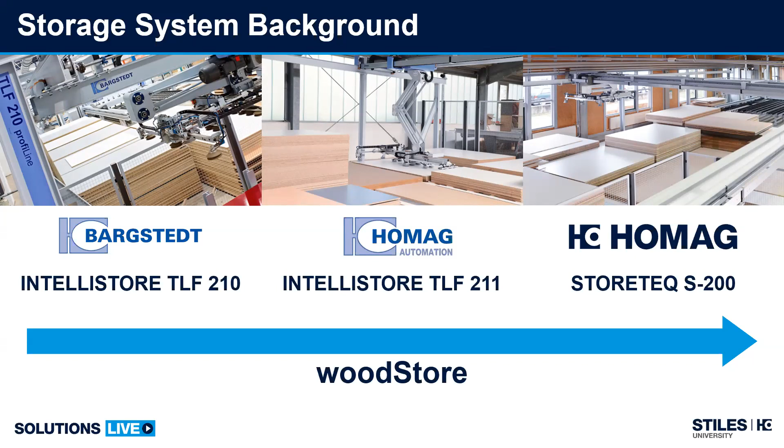So one of the things that's vitally important within the system, and anybody who's been running the system knows this: if you are incorporating a saw and using CutRite, you've probably already created your board code list. We just bring that board code list up to the IntelliStore system or to the WoodStore system.

But those board codes need to match. They have to be identically the same between the two softwares. Otherwise, we start having communication issues, we have inventory issues, we may even start developing or designing phantom panels, and it just becomes a mess over time. So there really aren't any hard rules for what your board code has to look like.

Everybody has their own special opinion of that, but you are limited in special characters. So a lot of times we're just listing what is the core material, the thickness. Does it have a top coat? Is it white melamine? Is it a colored melamine? High pressure laminate? Are they plastic materials? And then we typically add in at the end the overall size of the panels.

Now, one of the things that can help you with the system, and we're projecting down the road, is that our board codes typically record material type, the species if we're dealing with veneers, the color of the materials, high pressure laminate, we get into the plastics, solid surface materials, and obviously dimensions, and the panels are all weighed.

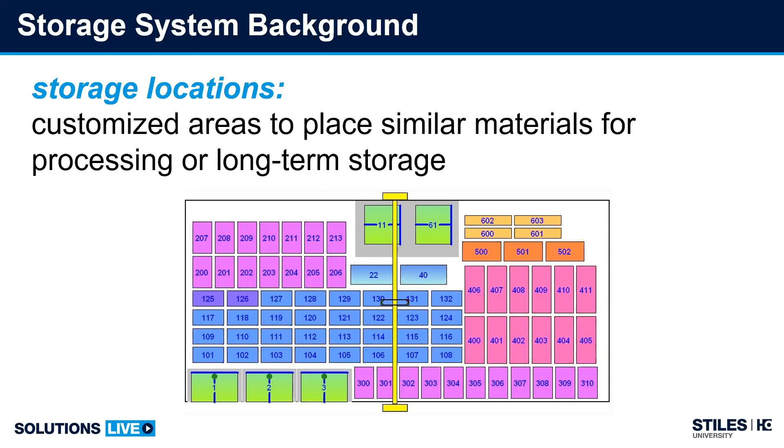So I have 2 suggestions. If you're going to design your own colors for the groups, try to stay away from the dark colors. You can't change the shade of the numbering, so the dark shades, the numbers become very hard to read. There's a blue line that shows up on the edge of the board to show you the level of capacity, how much room do you have. Those become very difficult to see. And try to stay away from the bright green colors because that gets confusing - is it a storage location, is it a machine, is it a conveyor? So other than that, you can do whatever you need to with the colors.

So let's talk about the difference between automatic storage and manual storage. Automatic storage is always referred to as being manipulated by the crane, so it's within the safety boundary, within the fence system. Manual storage is external - it could be in another building. It could be just a stack of material that is positioned someplace in the facility that we're waiting to use, or maybe it's a material that's being stored for a future job coming up.

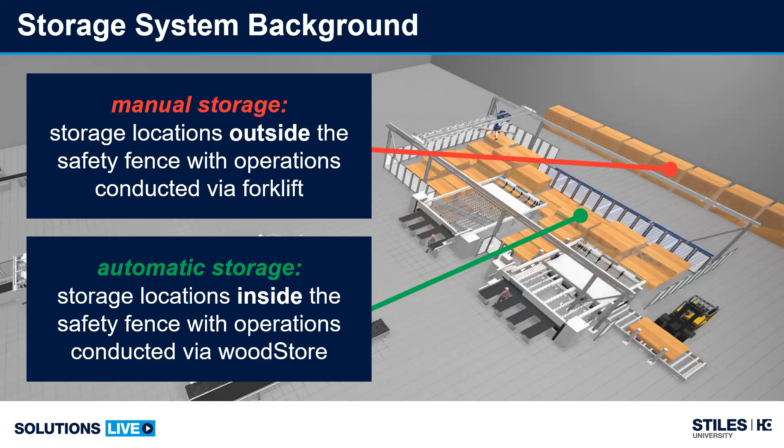So transfer options: we can transfer panels within the storage system, so we can move materials around if we need to manually optimize where we put these panels. Maybe when we first started with the system, we didn't project far enough ahead as to the variety of panels, maybe we want to help the system. But the system will also start looking at optimization on its own based upon how we set the panels.

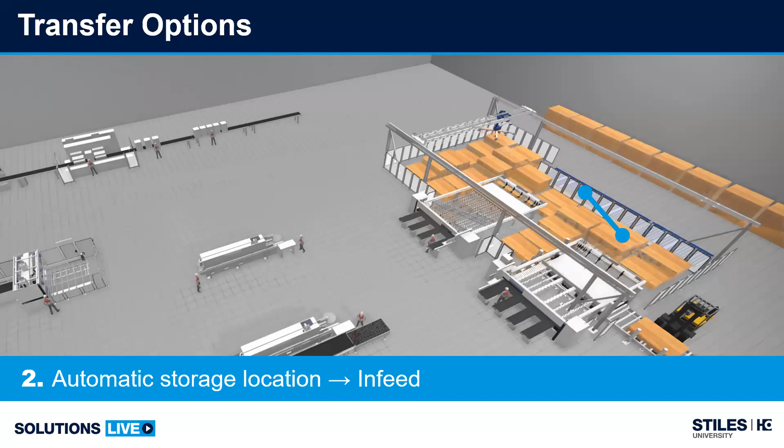We can also move materials from the in-feed to the internal storage, or we can pull materials out from the automatic storage to the in-feed. It could be that we have a problem with the material, we need to send it back to the manufacturer. Could be that we're pulling that material out because a job got canceled - now we're either going to store it or we're going to send it back. Could be that we're sending it to another machine in the facility that isn't incorporated with the automatic system. So there's a myriad of reasons we would do that.

Now we can also move material from manual storage to the in-feed, or from the in-feed out to manual storage. You'll notice that I put the note in here that there's a function within WoodStore called fill positions. This makes your job much easier, and we'll talk about fill positions toward the end of this session.

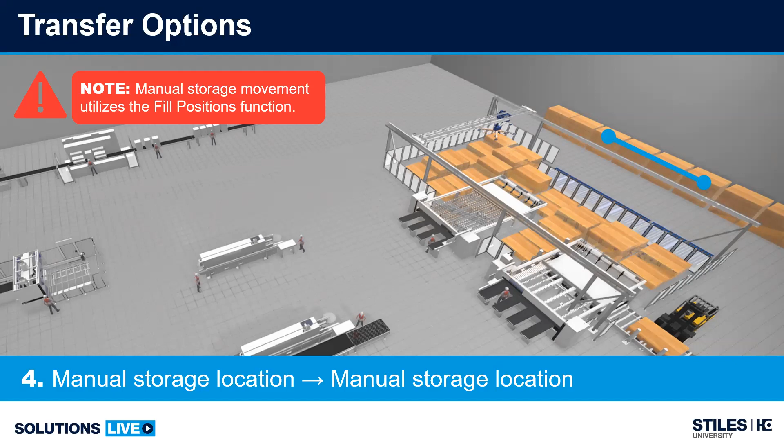Now you can move materials also within the automatic to manual, and then we can move the panel materials from manual to manual. So maybe we have 2 different manual storage locations, again, maybe we have a secondary building. So all these materials are held by inventory, so at any moment, you can determine whether you have enough material for a job coming up, or we need to expedite an order because we're going to come up short.

So some names that we throw around. Anytime I'm talking the crane, I'm talking vertical lift and rotation. So our crane will rotate 0 to 90 and 90 back to 0, it will not do a 360-degree move. We can only store materials on 0 and 90. And then the bridge is what moves the crane in the Y direction across the storage system, or in the length in the X direction of the storage system.

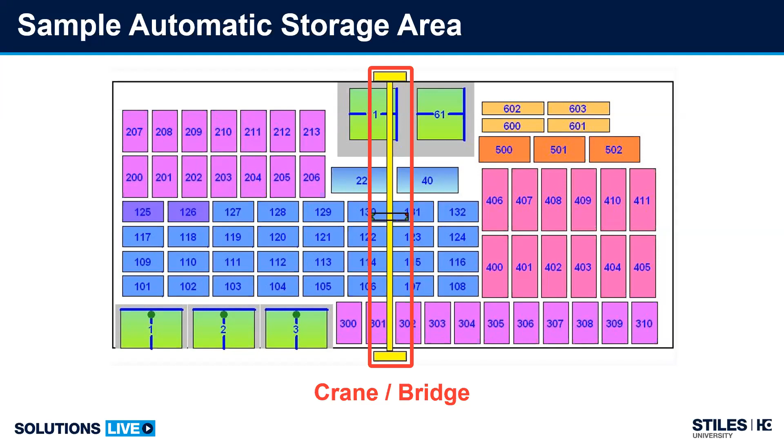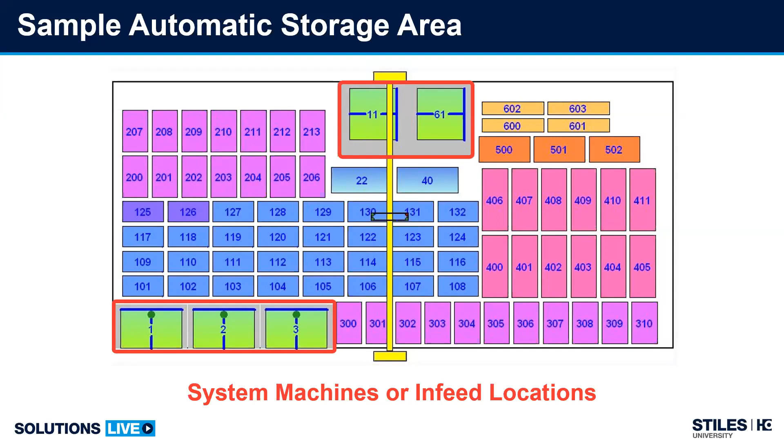We talked about machines and in-feed locations. They're all designated by specific numbers, but they're all designated by that bright green color. We talked about prior removal or pre-stacking materials - so you can designate any location in your storage system as a prior removal or pre-stacking location.

That way, when you're at home overnight, lights out, your system can pre-stack the material so that at 7 o'clock in the morning, your sawyer comes in already with a stack of random material ready to run.

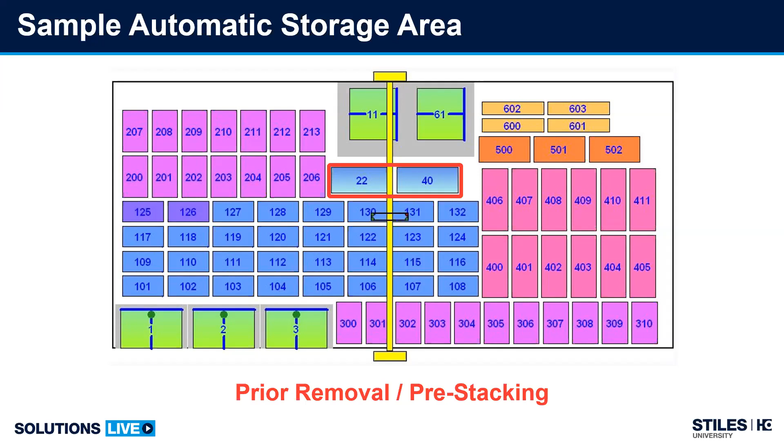You can always run any production list, but keep in mind that lift to drop anywhere in the system is usually 30 to 45 seconds. Depending on how buried the material is, you could wait several minutes for the crane to gain access. So a lot of customers do prior removals, and sometimes they designate 2 locations specifically for prior removal.

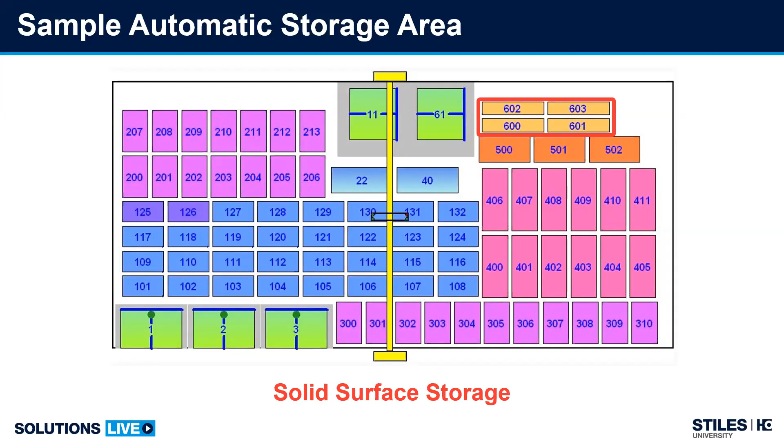I talked about storage locations. I have 4x8, 5x8, 5x12, 5x10. I've got solid surface materials, and then 2 locations that are still 4x8, but I specifically told them they're in the group veneer, so that's where all my real wood veneers go. I can be very specific about where I store that material.

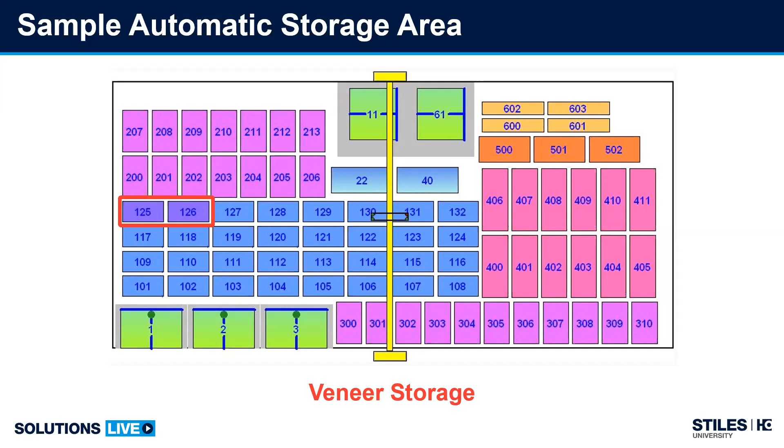So again, we talked automatic storage. That's within the system, within the safety boundaries. If you think automatic storage, think the crane.

So how do we remove material? The easiest is click and drag. You can click and drag a stack within the automatic system, go from one location to another, drag that material out of the system, or drag it back in.

It's going to pop up a display that says this is where you're coming from. In this illustration, I'm going from 124 to my in-feed number 2, and it says I have 25 sheets of material in that stack. I have the choice of how many I want to move, anywhere from 1 up to the full stack of material.

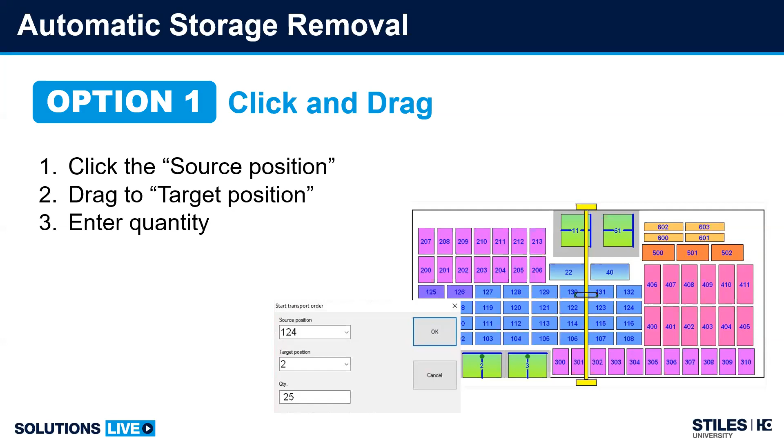But I can't pick and choose individual sheets that way, so that's where removal from storage list comes in. Within the removal storage, I tell it I need these materials. Might be we got a bad set, an off-color. If I set up the system with a distributor, I can make a list and say pull all the blue panels that came from this supplier. Right below that icon you'll see remove to in-feed, that's the start button. We click on the list, create the list, and then tell it remove to the in-feed.

When doing the removal list, sometimes the display pops up with an icon that says convert. What it's doing is uncovering—converting panels from one location to another to gain access, removing that overburden. The system will do that, and you'll see it pop up several times, especially if your system is configured more for random storage.

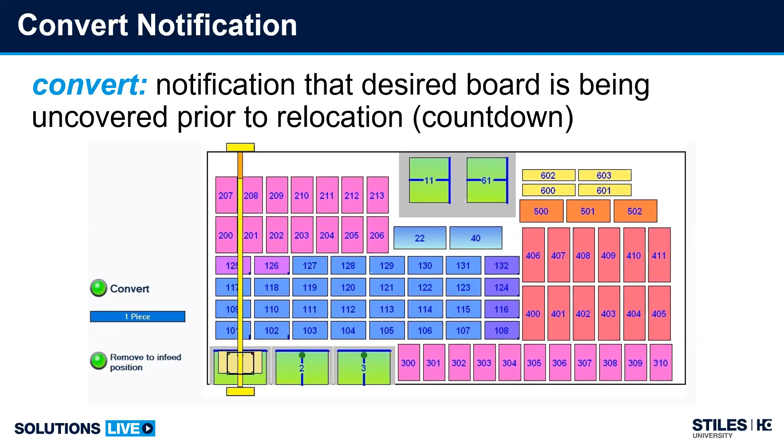Again, we talked about manual storage. You can create as many manual storage locations as you need within the software.

The last thing we'll talk about is this fill positions function. So I'm moving material from a manual storage to an in-feed. I could delete the panels from manual storage and re-enter all those panels on the in-feed, but that's time consuming and tedious, plus I can make mistakes. So why not electronically move that material from manual to in-feed?

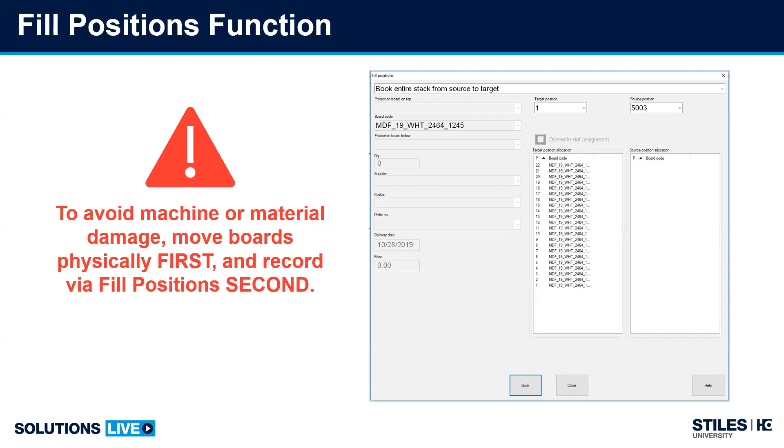Okay, so I'm going to start my IntelliStore system, my WoodStore software. Here's my configuration—you'll notice my colors have shifted a little bit. 126 and 125 are my veneered panels. 101, 102, and 103 are specifically 4x8 material, but in 3 colors: red, green, and blue. They're 19 millimeters thick. If I open up 101...

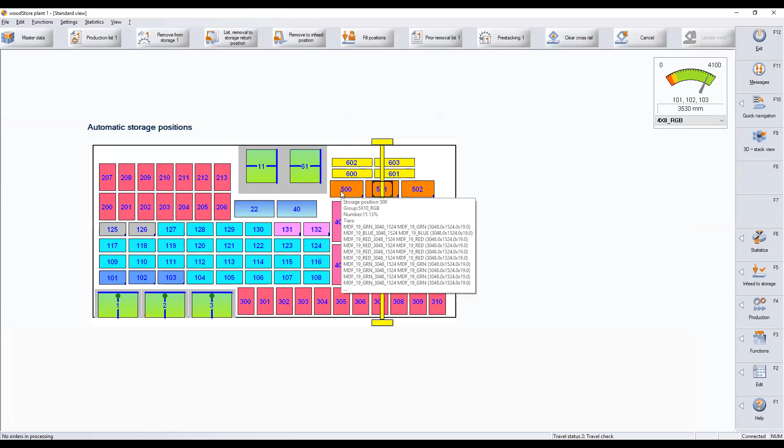Now we look at the stack, here's my board code, material code, material description—but these weren't established by any supplier, so I can't really pick and choose within that system. But if I look at 500, it has my 5x10 material, and you'll notice they're by random suppliers and this whole stack has been jumbled.

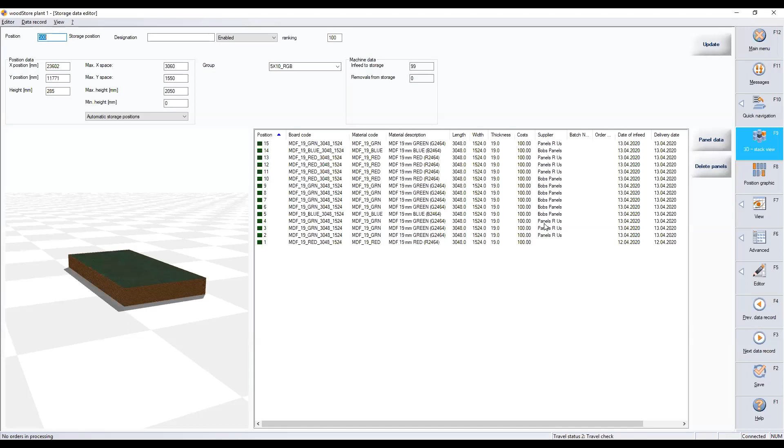So if I want to remove those materials, I can tell it I need all the panels that came from Bob's Panels. I make the list, tell it to start outfeeding those panels, and the crane does all the work for me.

So a little bit of demonstration. This is my stack of white melamine material. If I left click and drag, notice all the other locations turn gray.

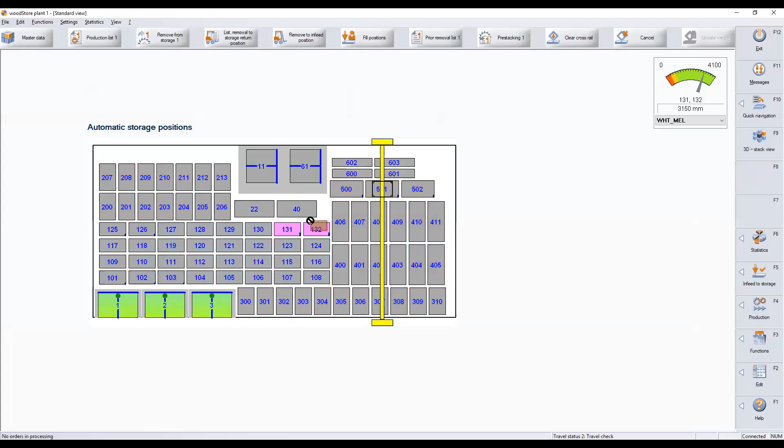So there's only 2 locations that my white material can go to, controlled by the groups. I'm going to move to location 3. It says I'm going from 131 to number 3, and there's 25 panels. Well, I only need 12. So we click OK, and now the crane is going to move those.

Obviously, my demonstration software is running slightly faster than the real system. Again, we could do this in real time, but we'd be here forever.

I can move that material back in, or I could just come over to the function buttons, click on F5, and infeed to storage. Once you infeed to storage, you're turning it over to the computer. The computer then looks at the groups and figures out where these panels need to be stored. So we need to remove some of the color materials.

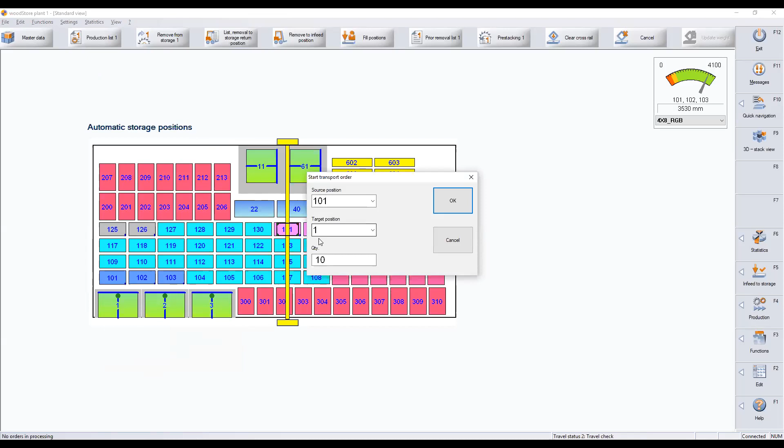So we go to 101, I drag it to location number 1. Again, going from 101 to 1, I want 10 panels. Yep, move all of them.

So naturally, I get some errors. Let's look and see what's going on with it. That was an error with my panel size and the size of the infeed. They're very close, but it did move all those materials. So it was giving me a warning.

So maybe I want to go back to my board code list and verify that my panel is the actual right size in the software. Sometimes you'll get messages, they're just telling you what's going on with the system. It didn't fault the operation, it was just giving me a notification. So we're going to drag those back in.

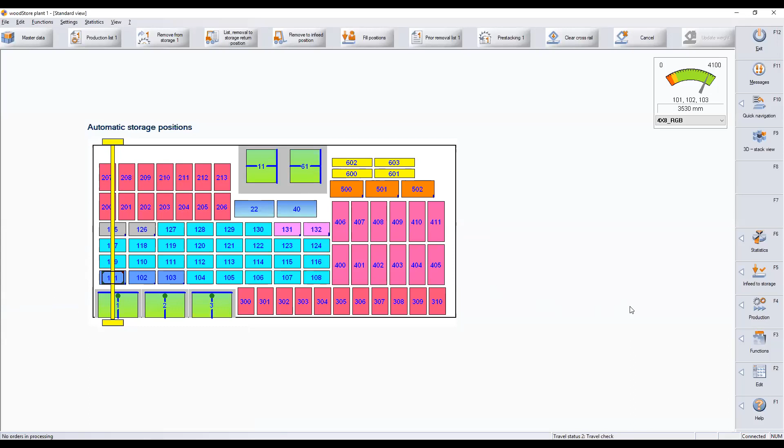Again, click and drag, super easy. If we come down to F3, click on Functions, go to List for Removal. Within this list, I double click and pull up the board code that I need. I need those blue panels.

Now you want to be very careful of this All Panel Codes option. If I come out of here, remove that material, and go to All Panel Codes, it tells me there are 155 panels in the system, and I'm removing all of them. I'm gutting my system because I need to move locations, I have to reconfigure my storage.

Think very carefully before we do this. Again, you want to be careful of all panel codes.

So we'll go back to the blue. We're going to go to location number 2. The supplier, I didn't put a supplier name in, so I can't pull up by batch number, I can't pull up by order, but I can tell it how many panels I need to pull.

So I could go in and tell it I want all of those panels. Click OK. Now I can drop over to the function bar and click F4, or I can exit back out to my main storage and click Remove to Infeed. If you look at this, 10 panels.

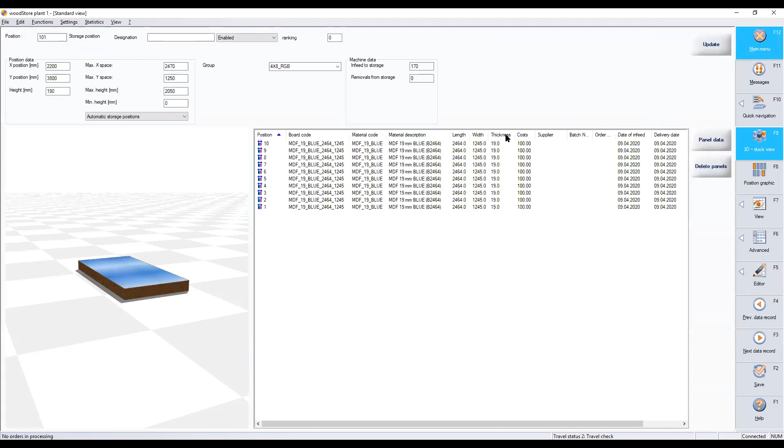That's interesting. Let me try the green panels. Phil, I think you might be using the wrong board code there, try using the second blue option. Yeah, try that one, I think that was what was. Oh, you're right, I was.

Thanks, Ian. Sure, yeah. So I was actually pulling from my 5x10 material, and there are no panels in there. So we'll go back.

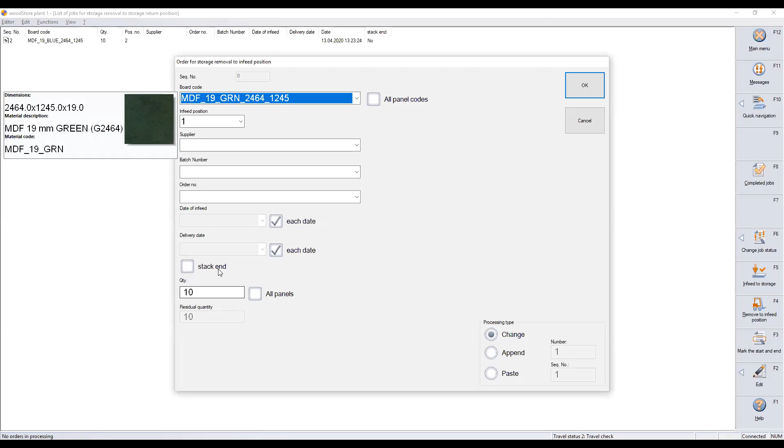Location number 2, I want all 10 panels. I can still double click, pull up the green panels, grab the right size this time. Go to location number 3. So within one list, I'm telling the system to move multiple panels out of the system.

So now I go F4 and remove to Infeed. Again, I'm getting that message telling me that I have a size disparity. So I can stop those messages from popping up, I have a freeze command. Again, it was just a notification saying that there was a disparity within that.

So here's all my panels, I've completely emptied those from the system. Again, we go into functions, list for prior removal, and then remove to infeed is the start button that moves those panels. Now I need to move those panels to a manual storage location.

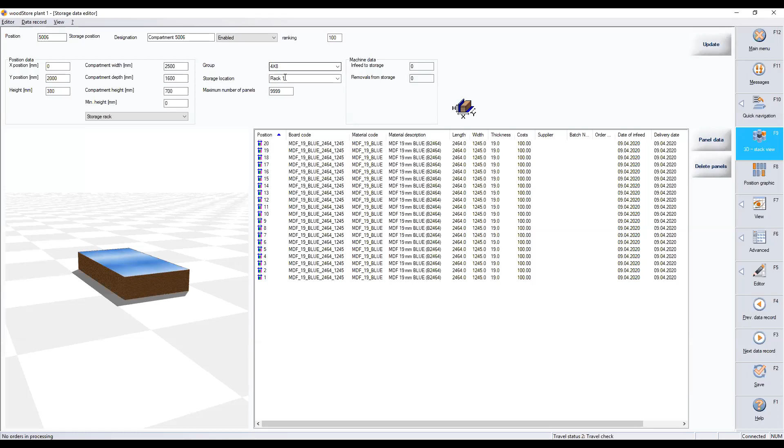Okay, so I right click, go to storage locations, and I want to look at rack 1. So what do I have available here? If I double click on 5006, I can see what my group is, and these are all 4x8 panels. If I click on 5004, these are all my white melamine.

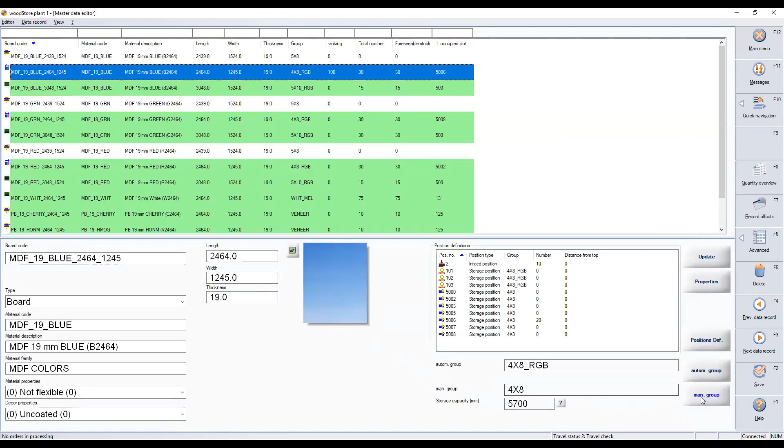And 5010, these are my 5x10 materials. So the problem I have is I have no place for these blue panels to go other than into a 4x8 location under manual storage. So I'm going to take them from one group in the automatic storage and put them in a generic 4x8. I need to move those to location 5003.

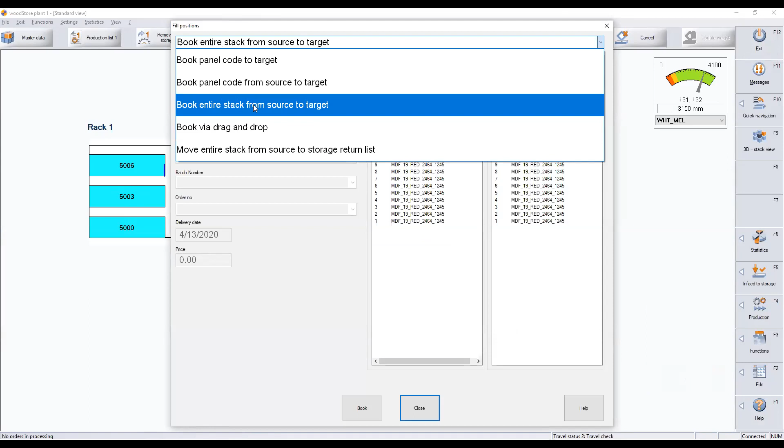So I click Edit, Fill Positions. Now I have multiple options in here. I can move a specific panel code, I can go from a source to a target, I can move an entire stack, I can even click and drag these.

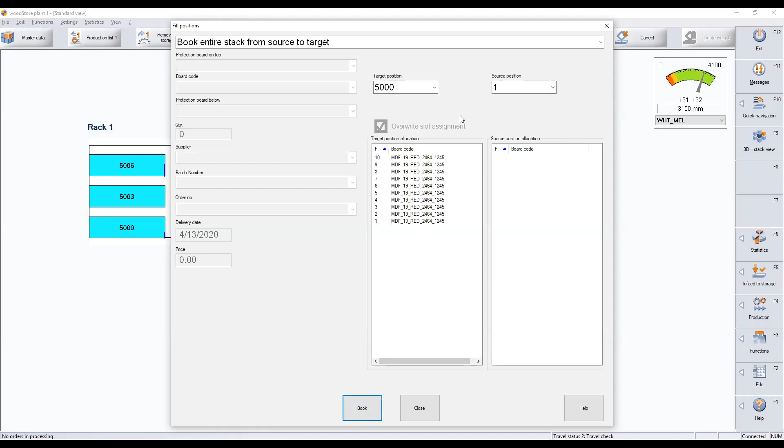So we're going to move an entire stack from a source to a target. We're going to go from location number 1, and we're going to put it in 5000. So I come down and click Book. It's moved that material electronically from the infeed location to my manual storage. So 5000 now has the 10 panels of the red material. I right click, back to automatic storage. Number 1 is empty. Much faster than deleting the material and then going back to manual storage and re-entering that material.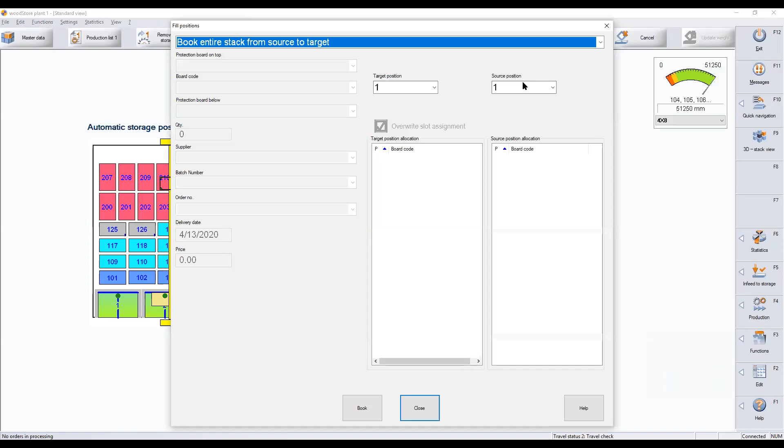So we'll do that again, only this time we're going to go into Fill Positions and click and drag. My source is number 2, and we're going to go to 5002. What I do is I highlight all the material, left click and drag. When I hit close, location 2 is empty, and I've just moved all that material to 5002.

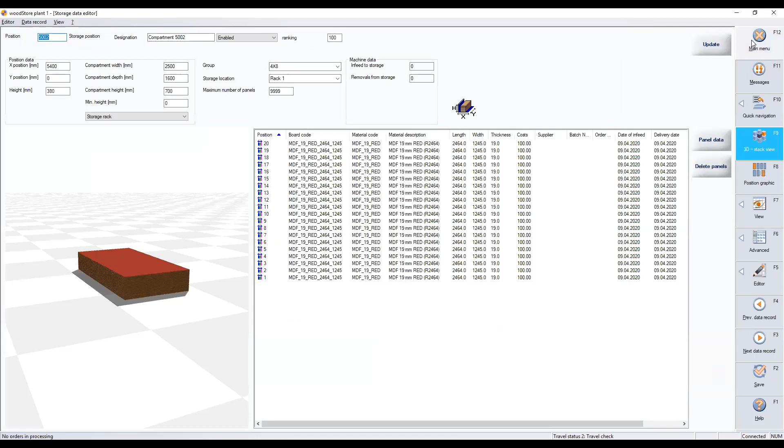So very quickly, I can use the list. I can designate which panels I need. I can do multiple panels into one location. So if I go into list for removal...

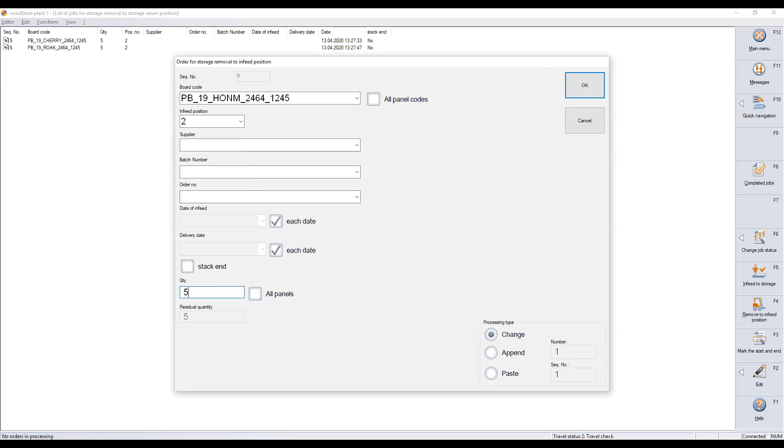So let's look at the veneers. I need the cherry veneer material going to location 2. I've got 10 panels in there, I only need 5 of them. We're also going to pull the red oak veneer, that's also going to go to location 2, and we need 5 of those. And then we'll pull up the Honduran mahogany and do the same thing, location 2, we need 5 of these. So you can create a list of the required materials.

Exit, go back to remove to infeed. Move the veneered materials. What you're going to see is that it's going to move a certain number of panels, and then it may have to do a conversion. We're lucky it didn't. So here's my Honduran mahogany, here's the red oak, here's the cherry.

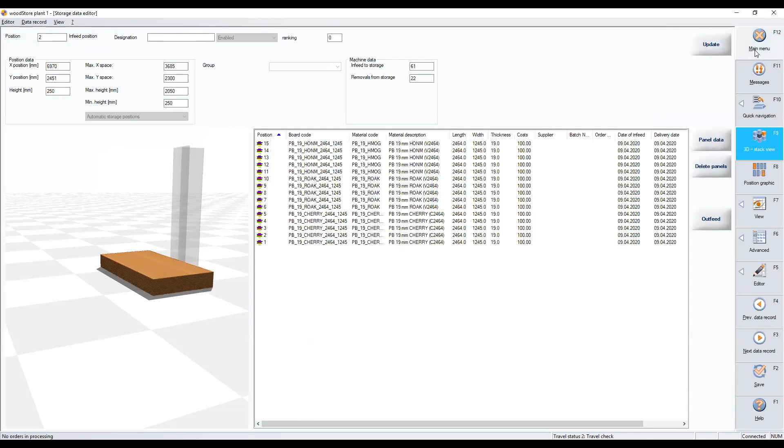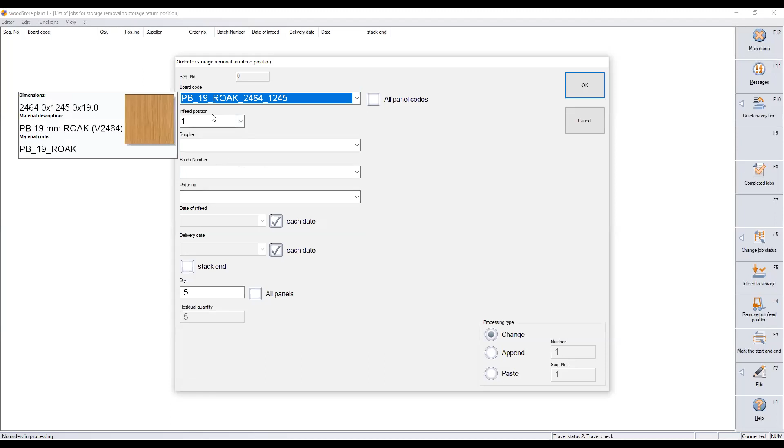So that's all Honduran mahogany. Here's my red oak, and it's buried underneath the cherry veneers. So I'm going to go to list for removal, create a new list for the red oak material, go to location 1, and I want the remaining 5 panels.

So when I click remove, you're going to see the convert function pop up. It's moving all the cherry panels off of the red oak, converting that over to location 125 so it can gain access to the red oak panels. The nice thing about the remove to storage list is that once I create the list and start it, I can continue on with my day. I don't have to stand by the system and manipulate it. I don't have to do things by hand.

So how do we do, Ian?

Great job, Phil. I just have one quick question for you. Can you explain again why it's important to move the panels physically first before we do any kind of work with the fill positions electronically? That's a good question.

So look at your system, and somebody left a panel on the infeed. It's in the infeed location, the proximity switch is activated, the crane knows that there's material there, and it only knows what you've told it. So if you electronically move the panels using fill position, moving it from manual storage to location number 1, the system immediately thinks there's 20 sheets of red material there. And if the saw calls up that material, it's going to come over and start accessing it. So my preference and recommendation is to have the fork truck driver move the material physically so that when we have that location occupied, it isn't told what's there until we use the fill position. Much less chance of having the crane do something unexpected.

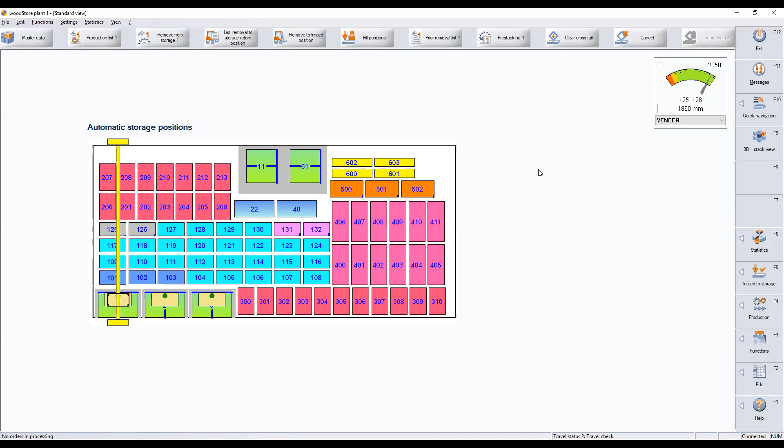That's a good question, Ian. Thanks for asking that. Sure. Well, Phil, I'm going to take over control one more time here from you. And just encourage anyone out there who is listening, if you have any questions for Phil, please share them using the Q&A window. We're happy to take some time right now. Phil can field any of those questions you may have relating to your WoodStore system and removing material.